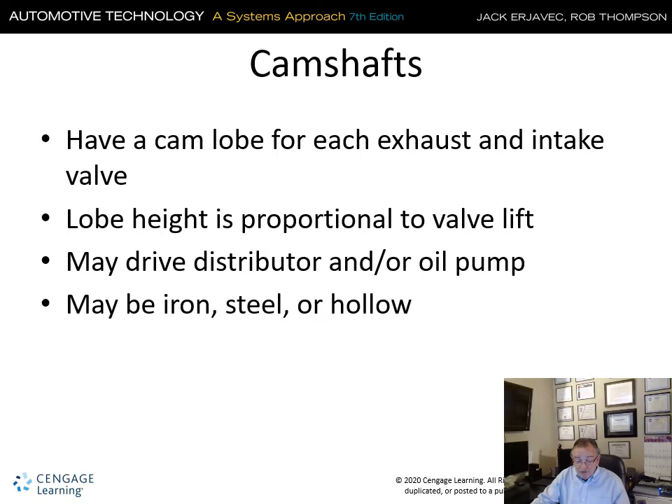Your typical overhead valve camshaft - here we have our camshaft, which is rotating in the block, typically above the crankshaft, driven by a chain or a gear.

This is showing a hydraulic lifter with a roller. There's going to be oil galleries drilled into the lifter, and it receives oil through the lifter bore. If it has that type of lifter, hydraulic, it's going to move oil through the push rod up to the rocker arm, so while the engine's running, you're going to have oil coming out in small droplets.

Here we're taking the motion and moving the push rod up while we move the valve down and open the valve - a pretty basic cross section on how this valve operates. Here it's on a smaller, what's called the inner base circle, so the valve would be closed. As the camshaft rotates around and the outer base circle and the lobe comes into a flank, it begins to push and move the push rod. It's going to move the lifter or cam follower, move the push rod up, and push the valve down to open it. Pretty straightforward.

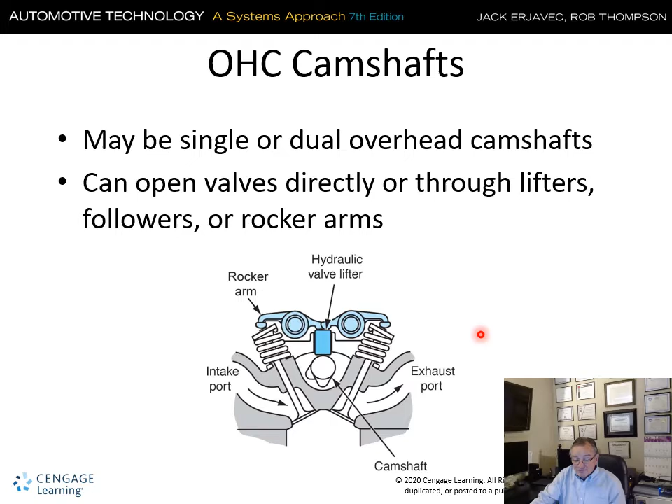You need 2 rotations here, 720 degrees, for 1 rotation on the cam, 360 degrees. So we have half the speed to give us the full combustion cycle, so the valves will open and close per crankshaft rotation. The valve openings and closings are based on the shape of the cam lobe - we're going to get into a diagram there to explain that.

This diagram represents how the camshaft actuates a valve and what actually occurs as the camshaft rotates through the cycle. We'll start up here as we're at the end of the exhaust stroke.

The intake valve begins to open and puts fresh air into the cylinder while the exhaust valve is still open. That's called valve overlap, and it helps cool the piston. Since the intake air is denser than the exhaust, which is burnt air minus the 21% oxygen and lighter and hotter, the colder, denser air will displace the exhaust burnt air. That happens right here.

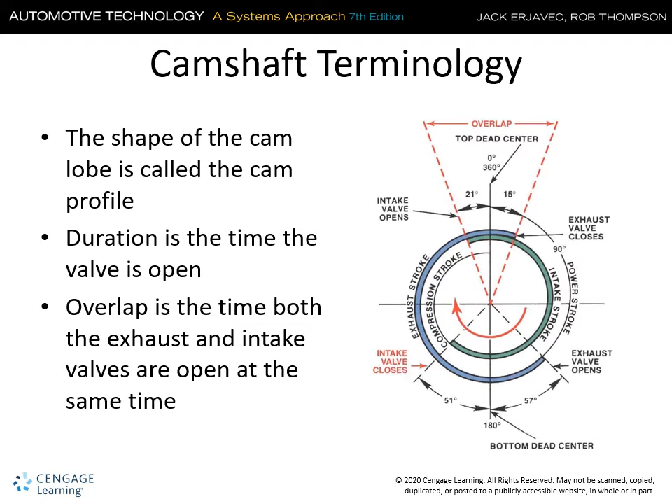We have the valves closed during the compression stroke. We have the valves closed during the ignition and the power stroke, and then the valves open for the exhaust stroke and the intake stroke. It's pretty straightforward once you see it, slow it down, and understand what the valves are doing as the cam rotates.

Here we're showing a camshaft in the block, and the cutaway shows the lifter here. It's above the crankshaft. This one is driven by the rear because it looks like we have a flywheel here, so this one is driven at the rear of the engine.

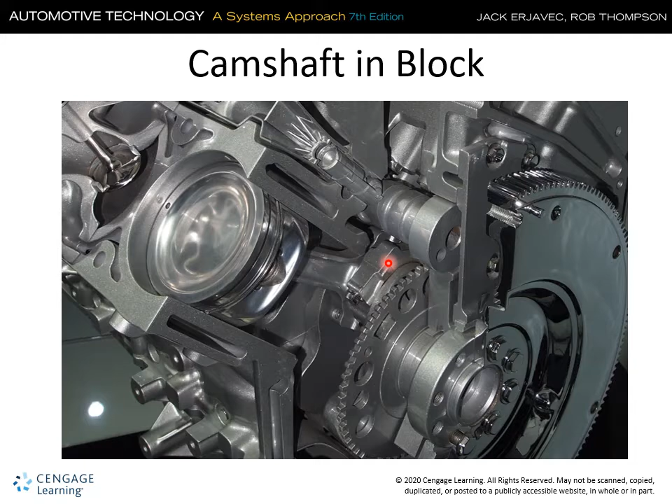So here's your flywheel, and here's what looks like a cam gear. Camshaft drives for overhead cams: we have sprockets on the camshaft and on the crankshaft gear. So we have a crankshaft gear and a camshaft gear, and you can see this one, the crankshaft, is obviously half the size of the camshaft.

Some are over 100,000 - the Hondas are 105,000 - and at that time you want to be replacing all the rotating parts. If you give the customer the option, you want them to understand that the water pump has to be changed, but you also have the belt tensioner and the seals that are below the cam gear and below the crankshaft gear. Anything that rotates should have those parts changed at that time. It would be a recommended service.

Your overhead valve was showing a crankshaft gear with a timing chain. This would have a cover on it, and the timing - the gear will have twice as many teeth on the cam as the crank.

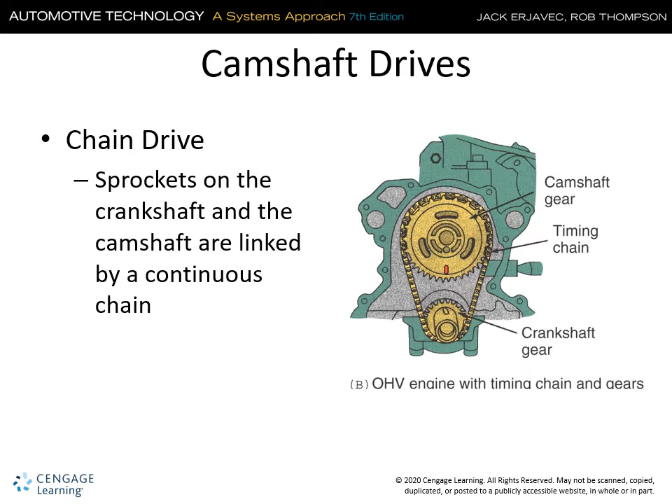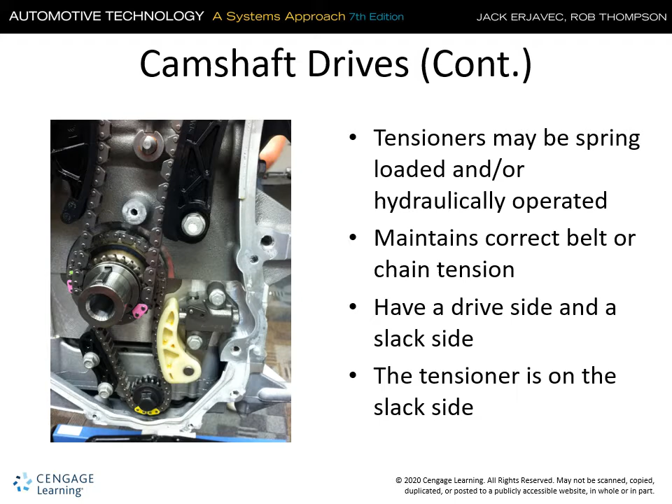Here we're showing a chain tensioner that's located on the slack side of the operation. We need to understand that over time, depending upon how the vehicle is driven, chains can stretch. Also there are instances of chain tensioners failing, so you want to check the technical service bulletins for that particular VIN and see if it has a history of a failed chain tensioner. If not, it's probably going to be okay if we've had the correct frequency of service and we don't have any concerns in the valve train.

Here's a variable valve timing, where we're showing an actuator here that is typically hydraulically actuated. Using overhead cam or overhead valve, it's going to change the timing, the lift and duration of the valve through the camshaft, using an actuator with phasing.

3 types of camshaft drives. You're going to write that down and email it to me, right? Thank you.

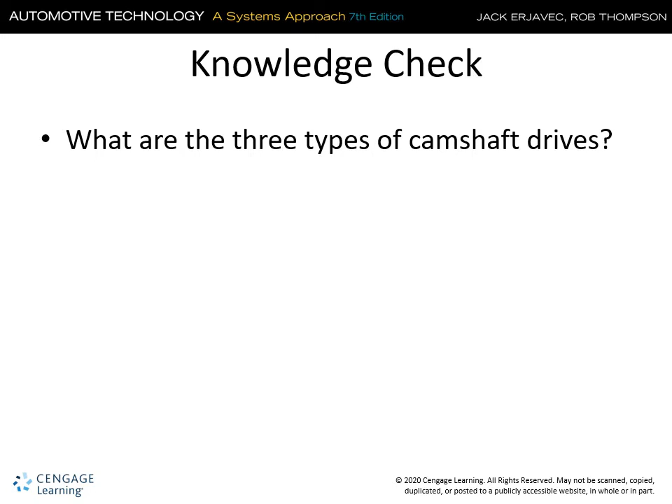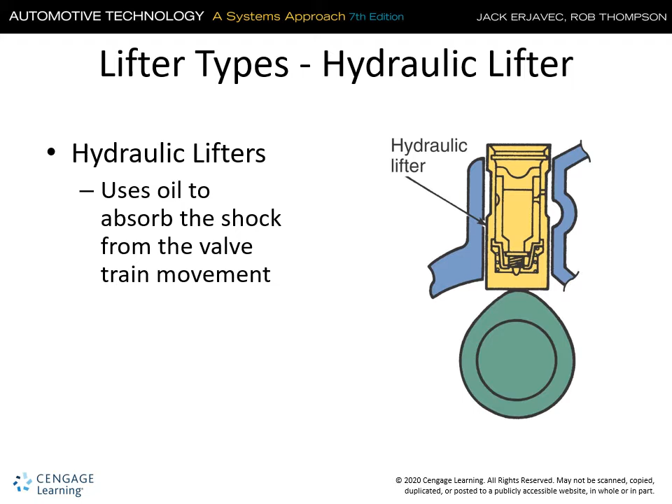Hydraulic lifters have oil galleries in the cylinder head. If this is overhead cam or overhead valve, both of them will have oil galleries. The oil will go into the lifter and actuate the position and the motion of the cam lobe, and that's going to transfer to the push rod or to the valve, depending upon if it's overhead cam or overhead valve where it's in the block.

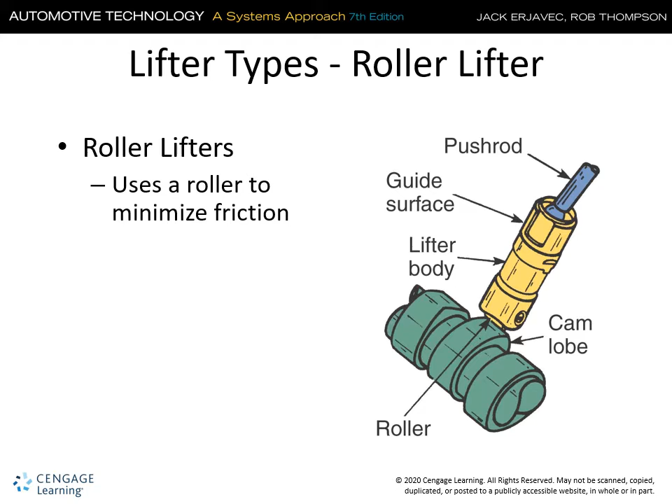Cylinder heads, cast iron or aluminum. Aluminum is the material of choice this century. It contains your valves, your valve seats, your valve guides, your rocker supports, and upper portion of the combustion chamber. There's coolant and oil return passages in the cylinder head, and it's also designed so that you get the performance that's engineered for that particular application.

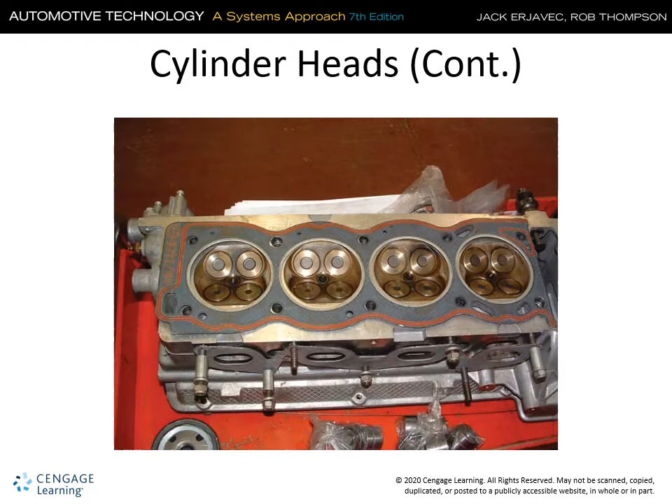This is showing a new cylinder head gasket with the fire ring, and if you look carefully, you should be able to see guide pins in here. They would be located at various locations. At least 2 of them are required to keep the cylinder head gasket from moving. You want to keep it on location.

Intake and exhaust ports are cast into the head. You have a variety of porting geometries and applications, but since most heads are aluminum, some heads have cross-flow or Siamese ports, so you're going to have the port split into two, so you're going to have a single port with 2 ports coming out in that application.

Here's an example of cross-flow and Siamese heads. We're showing the intake with the Siamese exhaust ports on this side, where we have an exhaust from each cylinder going into the exhaust manifold, considered a cross-flow and Siamese. So we have the diagram down here that explains it pretty simply. We have 4 intake ports, and cylinders number 2 and 3 have the Siamese port.

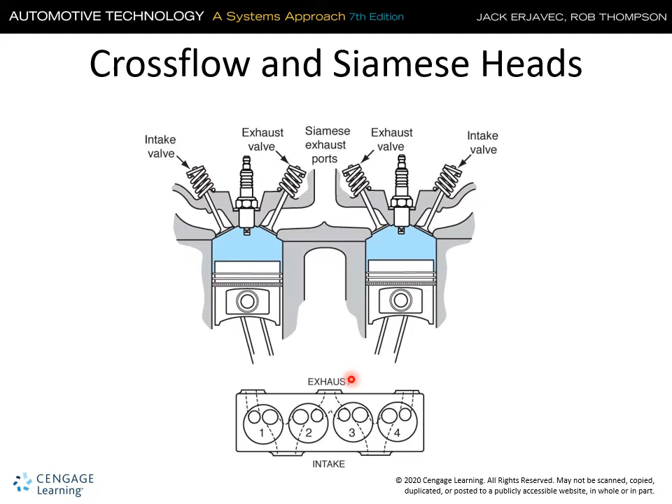Wedge-shaped chamber, spark plug is located at the widest part of the wedge, and in a hemispherical chamber, it's shaped like half a circle, and the spark plug is located at the center of the combustion chamber. Now, there's been a variety of these, engineering to change the location of the spark plug and try to get the most amount of power out of that location. So this has been going on for a number of years.

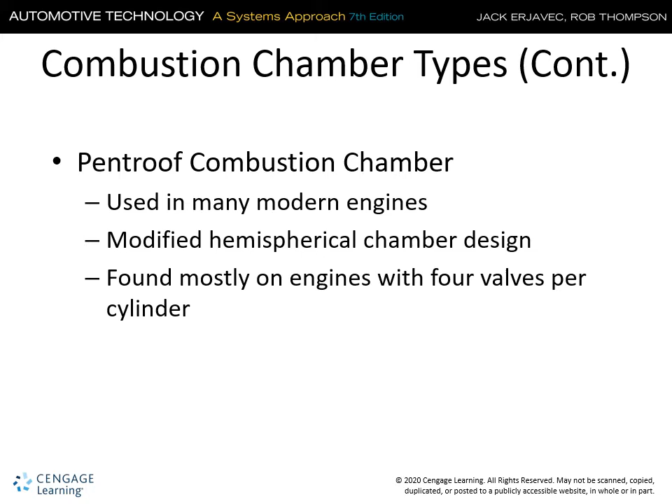A pent-roof combustion chamber is used in many modern engines. It's a modified Hemi design, and it's found mostly in engines with 4 valves per cylinder.

The design of the combustion chamber is one of the determining factors when it comes to the overall efficiency and power of the engine. The 3 most commonly found combustion designs in the U.S. are hemispherical, wedge shape, and the heart design.

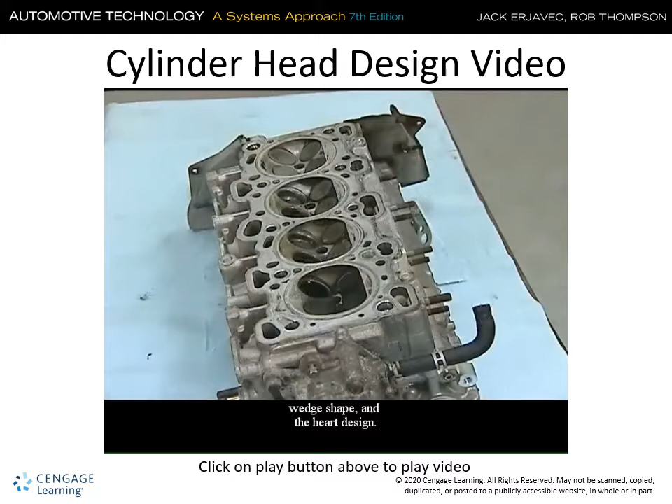The hemispherical combustion chamber looks like a half of a sphere. The valves are placed on an angle with the intake and exhaust located on opposite sides of the chamber, which creates excellent cross-flow and allows the engine to breathe more easily. It typically has a central spark plug, meaning the flame path has a relatively small distance to travel during ignition, creating a very efficient combustion process. The hemispherical design is commonly found in smaller passenger vehicles.

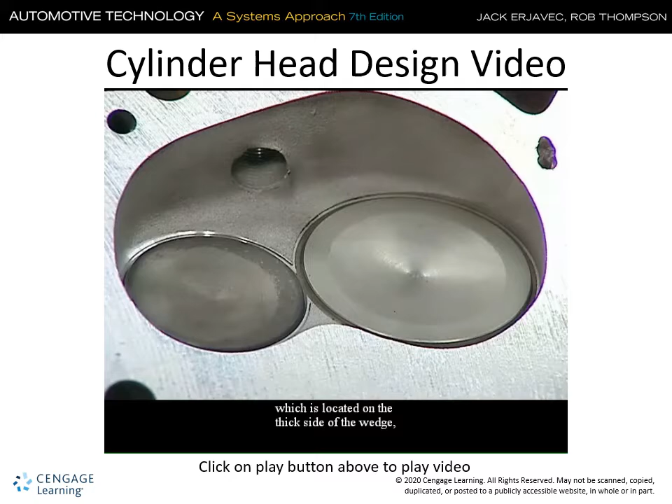In the wedge-shaped design, the inline valves are normally tilted away from the spark plug, which is located on the thick side of the wedge, positioned midway between the valves. The relatively steep walls in this design force the air-fuel flow path downward, resulting in less exhaust.

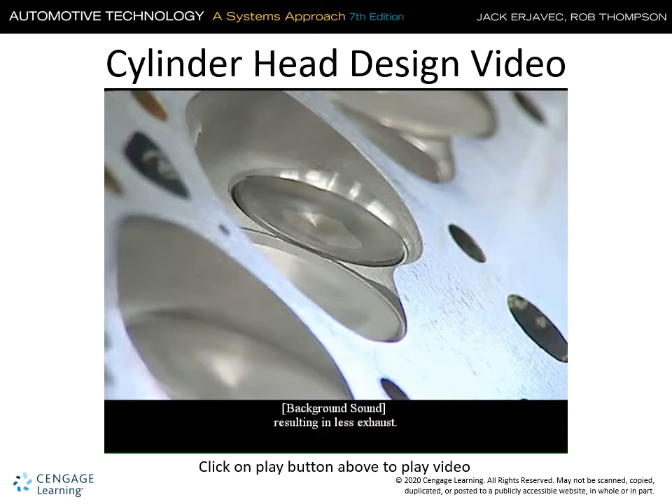The heart-shaped design is almost oval in shape, and the inline valves are side by side. The spark plug is pointed towards the exhaust of the chamber, which makes for a short flame path and increased power.

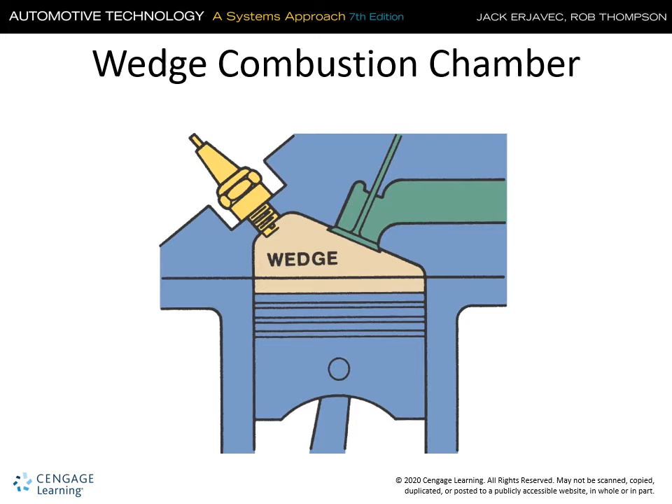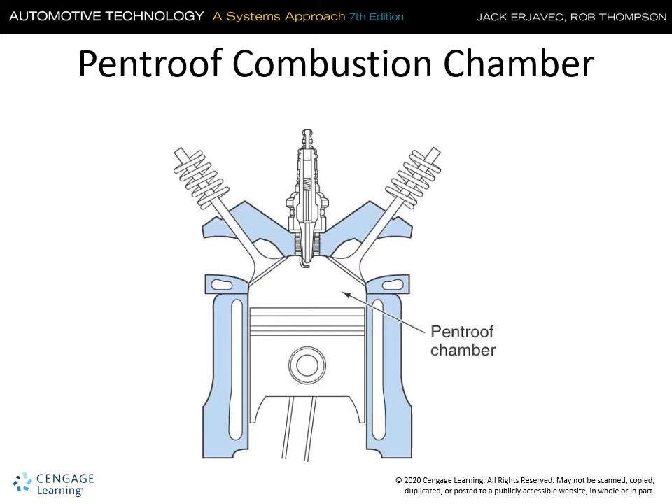The pentroof has the shape of the combustion chamber as a pentagram, and that provides certain efficiencies when you have the flame front and the combustion occur, because you actually have more pressure, giving the combustion chamber more power in this particular application. It's pretty common in today's engines that they went to the pent roof combustion chamber.

Intake and exhaust valves used to be called poppet valves - the British call them that. They allow air to flow in and out of the combustion chamber and seal the upper portion of the chamber. The intake valves are typically larger than the exhaust valves due to the fact that intake air is colder and heavier, while exhaust air is burnt air that no longer has oxygen in it and is at a higher temperature, so it can easily go out of the smaller valve.

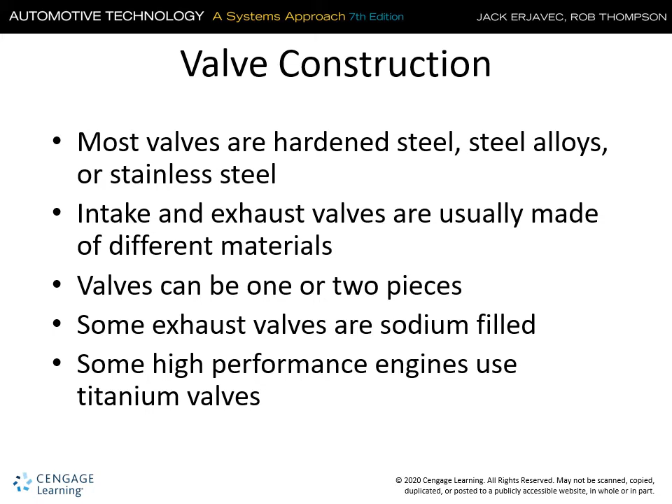Valve construction: hardened steel, steel alloys, or stainless. In most production engines, they're going to be steel alloys. Intake and exhaust valves are usually made from different materials because the intake valve operates in a much colder environment - the stem and up to the face of the valve can be a lot cooler than an exhaust valve. They can be one or two pieces, some are sodium filled, and some high performance and racing engines will use titanium alloys.

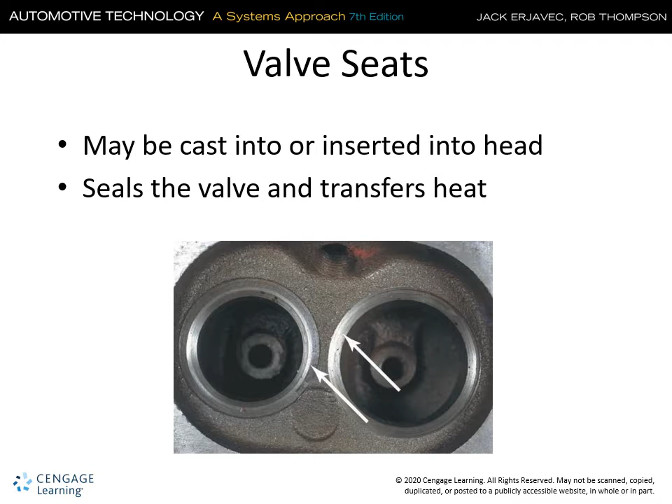Valve guides support the valve motion up and down. There's a virtually minimal amount of valve clearance between the valve stem and the valve guide - just enough room for oil to lubricate the valve stem, and it keeps the valve aligned with the valve seat. So the valve has to be concentric and the valve stem has to be concentric to the valve guide. They can be cast into or inserts in the cylinder head.

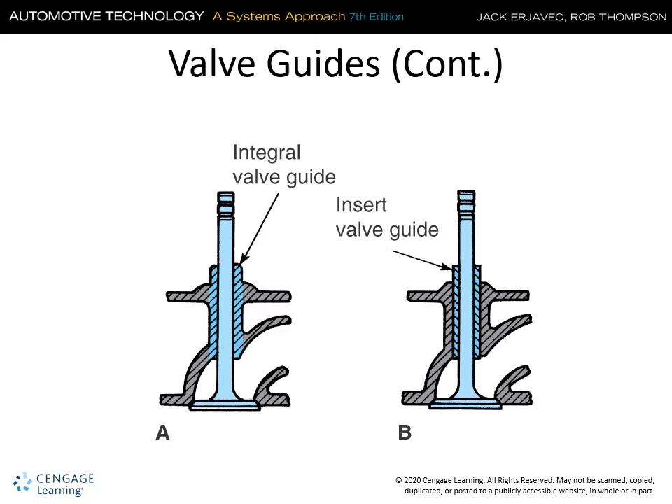Here we're showing a valve guide, which is an insert - a wearable and serviceable item. And here we're showing the integral valve guide, which is just part of the casting. When this wears, the cylinder head has to be completely overhauled. Sometimes if it's high value, they will bore this out and install valve guides; if not, they'll just replace the cylinder head. Typically aluminum cylinder heads, when they overheat, are replaced. Cast iron cylinder heads don't have the type of geometry that deforms and can take more heat than the aluminum ones. So you want to pay attention to what materials you have and what the most likely failure is that's going to send a cylinder head out for an overhaul or just a replacement.

Valve springs, retainers, and oil seals. When you compress the retainer, use the magnet here and keep track of your wedges. Your wedge-shaped keepers are specific to this particular engine, so you don't want to lose a keeper. That could stop the job.

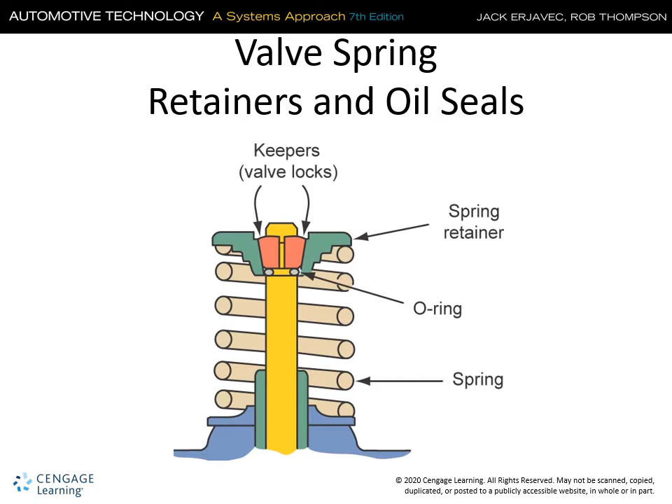Cam followers. There's a variety of cam followers out there in overhead cam engines. They are called buckets, and the hydraulic ones will have an adjustment for lash. Some of these will have shims that control the valve lash, or this one's showing an adjustment. This can be used hydraulically to adjust the valve lash, and it increases the contact between the cam and the valve. There are a variety of different cam actuations and adjustments. With an overhead cam, the camshaft is located right at the valve, so we don't have the lifter, push rod, and rocker that you'd have in an overhead valve engine. So an overhead cam has far fewer parts and is much closer to the valve it's actuating.

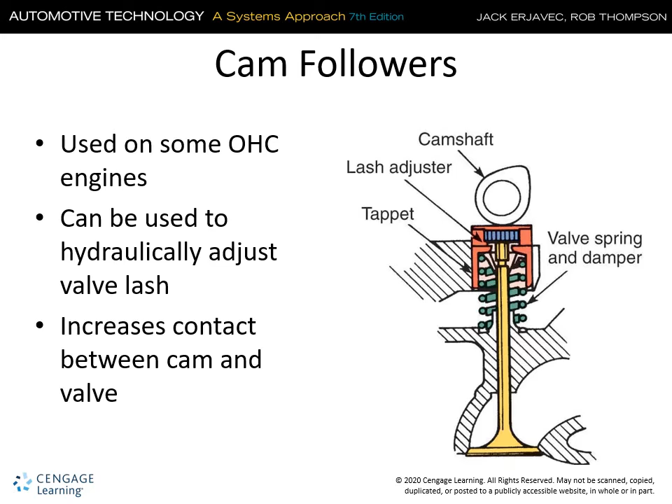Camshaft bearings. In many overhead cam engines, we have an aluminum cylinder head with an aluminum bearing cap and hardened steel flange bolts with a specific taper, and oil flows through the cam cap. That bore machined into the cylinder head has oil galleries drilled in, keeping oil flow through the bearing side of the cam. These applications generally don't necessarily have bearings; they increase the oil flow, and it's enough to keep the cam moving clean and without friction on the aluminum, so it needs that oil. Having the correct frequency of oil change and keeping the oil clean will keep this application running longer.

In engines that get sludge, they're going to create problems with friction in an overhead cam situation like this. So correct frequency of service is very important to the operation of these overhead cam engines.

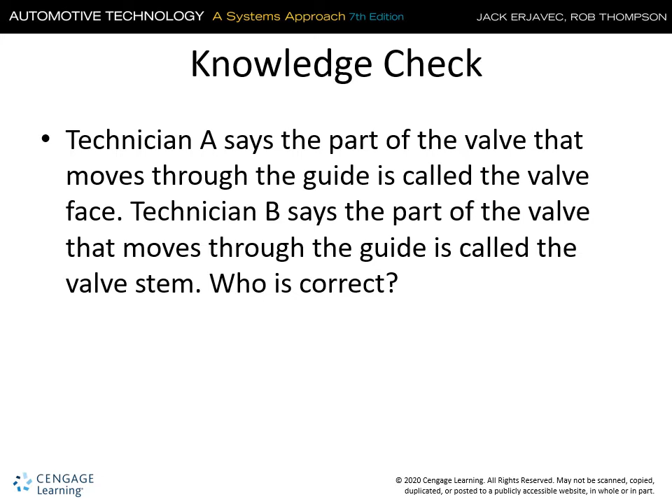Multi-valved engines. We typically started out with 2-valve engines. A lot of engines today are 4-valve, with 2 intake and 2 exhaust valves. We've seen 3-valve engines coming from Japan and Europe, with 2 smaller intake valves and 1 larger exhaust valve. We've also seen 5-valve engines with 3 intake valves and 2 exhaust valves. So there's been a variety of utilizations engineered into engines. However, the 4-valve is the most common configuration you'll see today.

Variable valve timing technology controls 3 key characteristics of intake and exhaust valves: the valve timing, the point at which the piston moves and which valves open and close; the valve duration, how long the valves stay open; and the valve lift, how much the valves physically open.

To do this, there are different sensors such as airflow and camshaft positioning sensors. They feed information to the engine control unit, which uses a variety of mechanisms to control the valve characteristics. A Honda VTEC, for example, physically moves the camshaft to give the valve more lift. There are a few different ways manufacturers do this, but performance is what drives this feature in valves today.

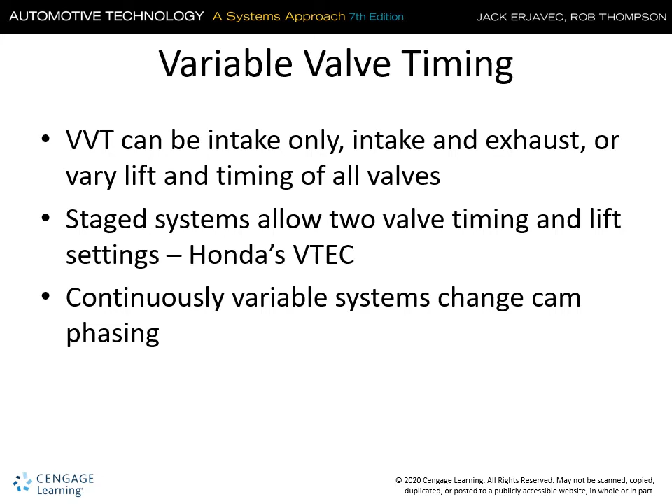Vehicles equipped with variable valve timing have become commonplace over the last 15 to 20 years. Different versions of variable valve technology exist, with the ability to switch cam lobes within the RPM band to offer valve lift, duration, and timing to suit various performance needs. Even before this, engines used a phaser to manipulate cam position and valve timing.

The phaser style of variable valve timing is common today. They can be found on just intake, just exhaust, or both intake and exhaust cams. The alteration of cam position changes the cam center line of the lobe and the separation angle between the intake and exhaust cams. This gives flexibility in improving fuel economy and power while continuing to meet emission standards.

The powertrain control module duty-cycles a solenoid that alters the valve position. The oil control valve is an oil traffic control device, and it determines which ports receive pressure and which are vented.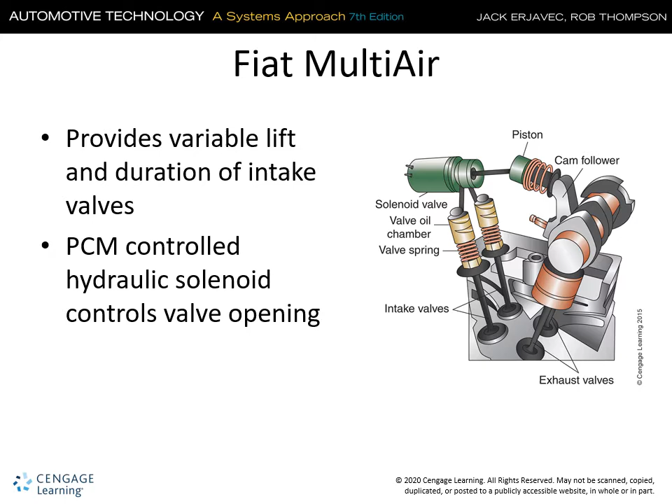Cylinder deactivation is common in today's modern vehicles. Manufacturers try to save fuel and have just enough cylinders active for the power needed. So how does cylinder deactivation work? It basically closes the intake valves that draw in air and the exhaust valves that release spent gas. It also stops injecting fuel into the cylinder.

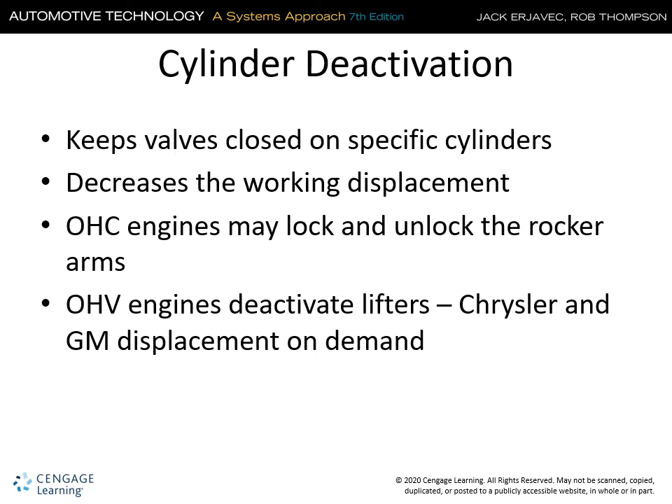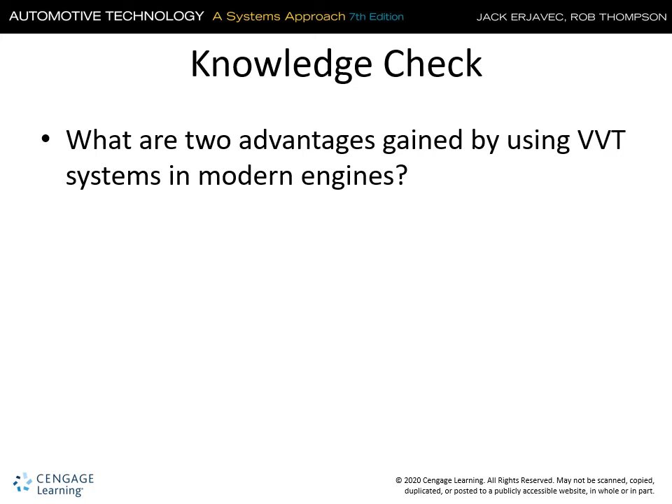On to cylinder head disassembly. Measure spring installed height before disassembly. This way you know if everything's assembled correctly—you have your wedge-shaped keepers and your retainer correctly positioned—you'll have the ability to match the height that was originally in here between the base and the bottom of the retainer with an installed height. So you know what that height is before you continue. If you know what you had before you disassembled it, you have a better chance of attaining that measurement when you do your assembly.

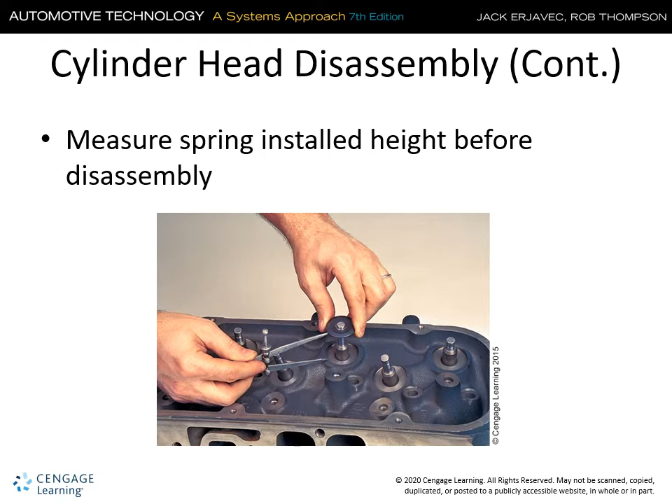For cylinder head disassembly, you could use some tools to loosen the valve keeper. Some people tap them with a soft mallet and a socket. We're using the pneumatic spring compressor in school, which makes it nice to remove the keepers. Just take care and organize all the parts that come off—your retainers, your keepers, and your springs. Those have to be organized per cylinder and valve location.

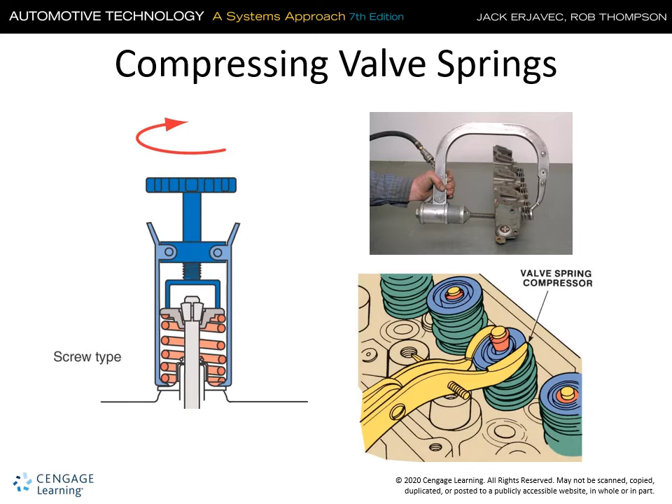Different types of compressors. We're using this one at school, but in other situations you have to adjust the arms so that you have clearance between the retainer, the valve stem top, and the two wedge-shaped keepers. There's a variety of tools out there that control the pressure on the retainer. In this situation, you can slowly apply pressure and your valve keepers aren't going anywhere. When you use the pneumatic one, it activates quickly, so you have to adjust the reach of the arm to get just enough compression to expose your wedge-shaped keepers, and you can remove them with your magnet and continue.

Cylinder head inspection. Any interference damage between a piston and a valve is typically fatal to the cylinder head, and you can have cracks in the area of the valve guide.

Any dent, scratches, cracks, or heat effect should be noted. You want to check the intake and exhaust manifold mount and surface flatness with a straight edge. Those have to be perfect.

With aluminum cylinder heads, once you have damage in one spot, it's probably time to replace the head. So you want to do a thorough inspection once you have all the components out of the cylinder head. Measure cylinder head warpage in a variety of axes.

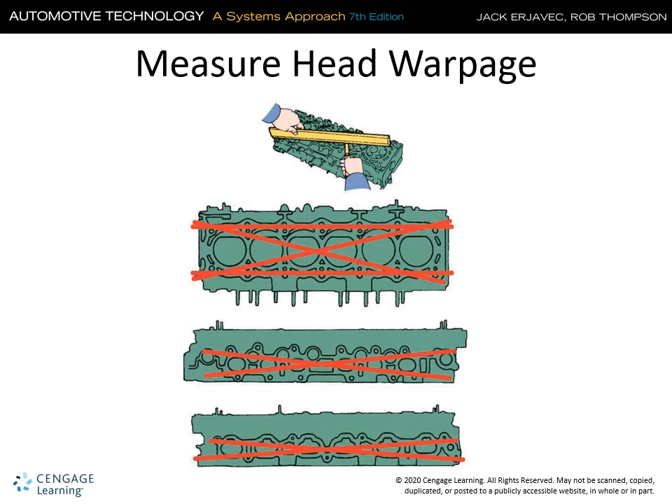You need to do this so that you're sure the intake, exhaust, and cylinder head surfaces are within specification. If you don't, your ability to gasket and hold the necessary pressures won't be there. So you want to make sure there's no cylinder head warpage, otherwise you could be building an engine that won't last, and you don't want to do that.

Check aluminum cylinder heads for porosity leaks. Aluminum will degrade from electrolysis, it'll degrade from vibration, and it'll fatigue differently than steel. So you want to make sure everything has a good physical look to the surface. For thicknesses, you have to utilize manufacturer specifications whenever something has to be go or no-go in the process. The styles of heads require proper cam bore alignment, so you want to make sure the journals are sitting in a cam bore appropriate for that particular application.

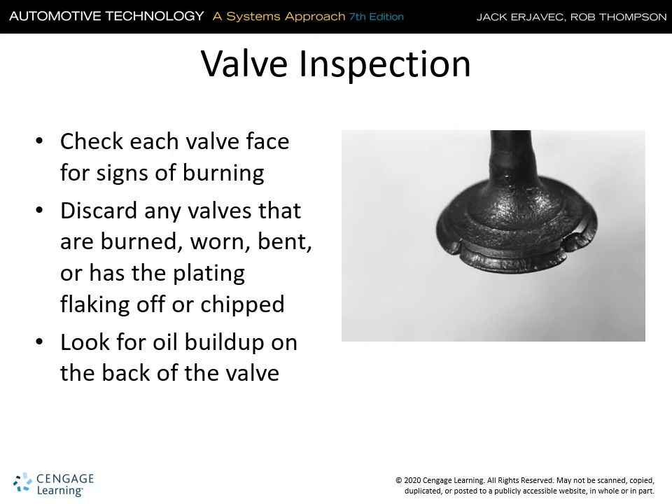Valve inspection. Burnt valve faces, no margin, oil buildup, and carbon buildup are all signs that valves need to be serviced and or replaced. A critical dimension here is your valve margin. The margin has to meet a minimum called out in specification, because if you don't have a valve margin, you're going to have a burn at the location where it seals.

The top of the valve stem can mushroom, and sometimes you can take a certain amount of material off the valve and shim the spring the appropriate amount. But the diameter, the straightness, and the angle of the valve face are all considerations for wear. You want to be aware of where you're looking and what the specifications are for that particular application.

Valve seats: again, heat effect, burning, cracks, and deterioration. Check for any loose seats. Valve seats can sink into the cylinder head further than they should, and seats need to be replaced if the valve was broken or bent.

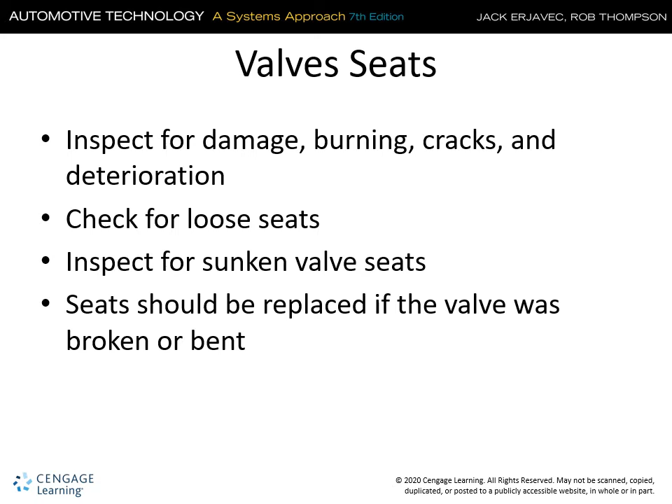Valve seats can be pried out if you do it carefully and gradually so you don't damage the cylinder head. Retainers and keepers: worn retainers will allow the spring to move away from the valve center line. That will affect valve operation and eventually drivability if it's extreme.

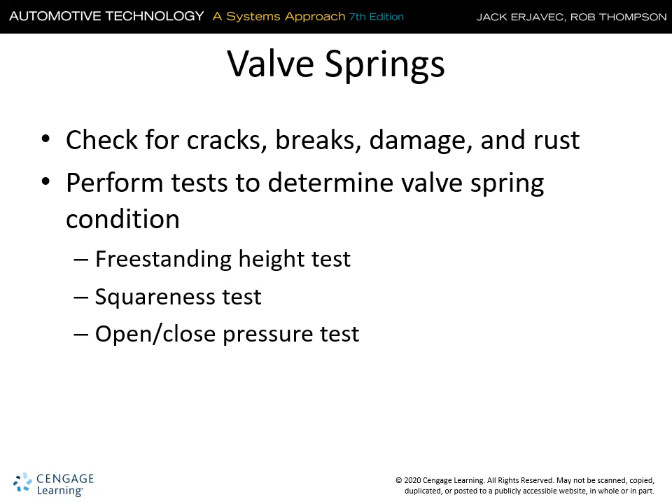Valve springs have freestanding height, squareness, and the pressure when the valve is engaged. Those specifications come out of your Mitchell Pro Demand or a manufacturer's platform for that particular vehicle and engine.

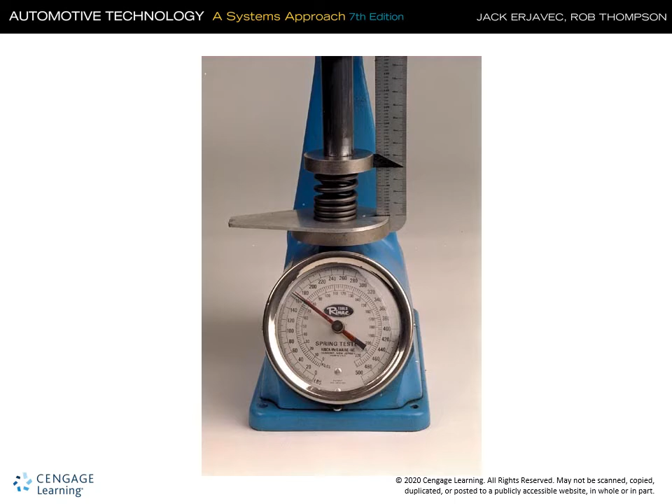We also have the pressure called out by the manufacturer for valve actuation. We want to make sure the springs have the correct pressure specification once they've been actuated. So you go from installed height on the ruler to the actuated height for the valve fully open, and you write down your pressure. That's a job sheet you need to do for that.

Inspection of the valve train. Timing belts are typically replaced when the engine and or cylinder head are rebuilt. Check that there are no fluid leaks that can damage the belt. If you have coolant or oil leaking on your timing belt, that could seriously degrade the strength of the belt, and you want to make sure that's not happening.

Timing chains will stretch over long periods of service, so you want to make sure the belts or the timing chain are within specification.

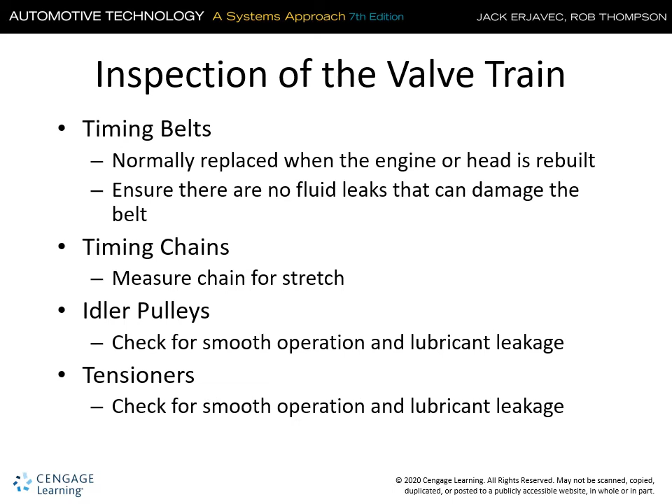Idler pulleys: in some applications, you want idlers and tensioners not only checked, but if you have a 100,000-mile service interval with your timing belt, you definitely want to replace the water pump and anything that rotates, including tensioners and idlers. Also, while you're in there, get the seals out of the camshaft and the front of the crankshaft, because they're easy to get to and only take a small amount of time to replace. This is a good practice to offer the customer for a small additional fee.

Check gears and sprockets for any wear, breakage, or alignment problems. Cam phasers have a testing procedure, as do cam followers and lash adjusters. Lash adjusters have to be cleaned, typically soaked in some type of solvent and blown out with gentle compressed air, because they have oil galleries in them. Zero lash adjusters, if they're not working correctly, can cause drivability concerns.

Rocker arms: the contact point and the oil holes have to be clean. Push rods, you have to check them for oil passage and straightness, so you can soak them in solvent, blow them out with compressed air, and roll them on a flat surface—if there's any wobble, they're not serviceable.

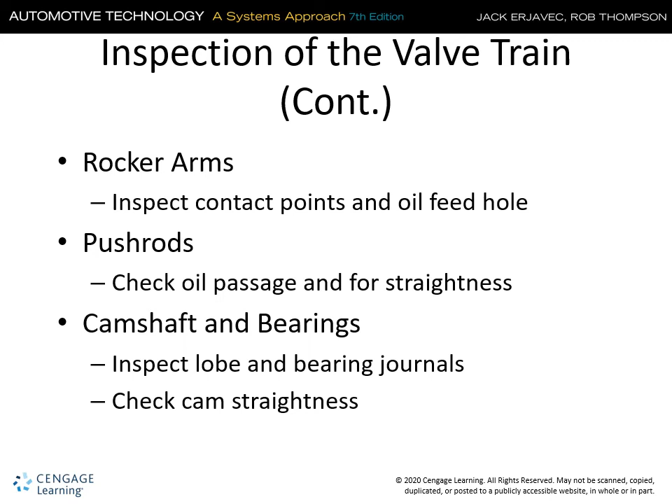Camshaft and bearings: inspect the lobes and the bearing journals and check the cam for straightness. Typically on a V-block with dial indicators will show you any run out that occurs, and you only have a very small amount of allowable run out on a camshaft, so you want to make sure you're well within specifications. If it's borderline and you put it in an engine, the engine may not survive very long, and the valve train could have drivability issues or complete failure.

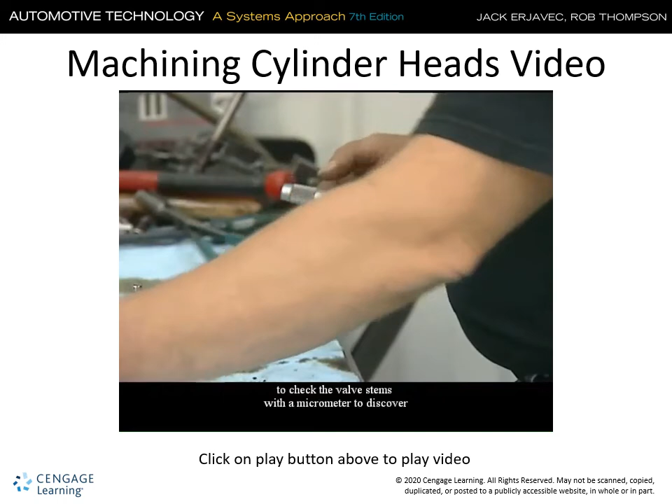Before any work can be done on the cylinder, you'll need to check the valve stems with a micrometer to discover if they can or cannot be reused. If they can be reused, grind the valve tip just enough to flatten it, and then angle and clean the valve face until the surface is nice and smooth. If you notice that the grinding wheel can't make contact with the entire face of the valve, throw it away—it means the valve stem is bent and needs to be replaced.

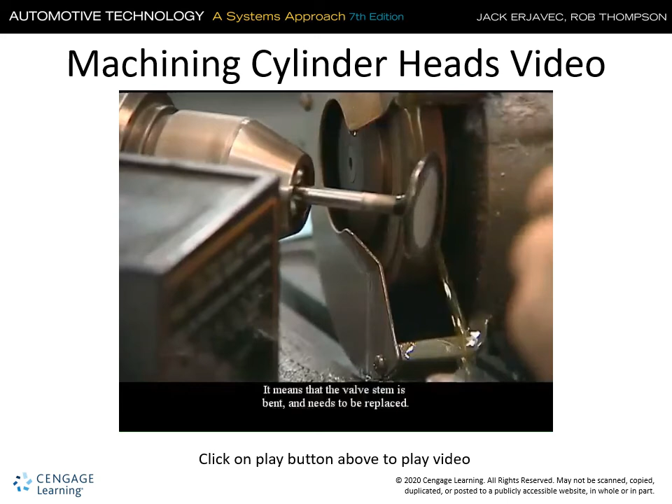Once you've made a determination about the condition of the valve and stem, the next step is to check the valve guide, which can typically be repaired by pressing a thin wall of bronze into the head with an air hammer. Once the lining is in place, a calibrated steel broach is driven all the way through the bronze liner, and then any excess liner remaining on the top and bottom is removed.

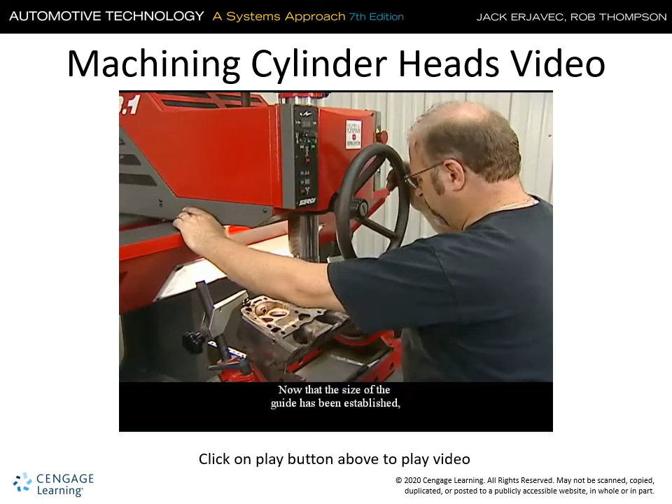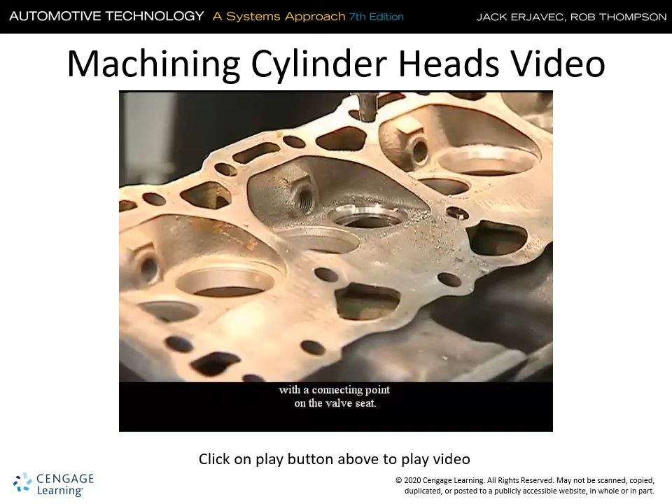Now that the size of the guide has been established, the next task is cutting the valve seats. Many of today's valve seat and guide machines use 3-blade carbide cutters that allow the operator to cut all 3 angles of the valve seat at the same time. The top and bottom cut, also known as the throat cut, is designed to maintain proper airflow in and out of the chamber, while the middle cut, or seat angle, provides the valve face with a connecting point on the valve seat. The same process is used to cut both the intake and exhaust seats.

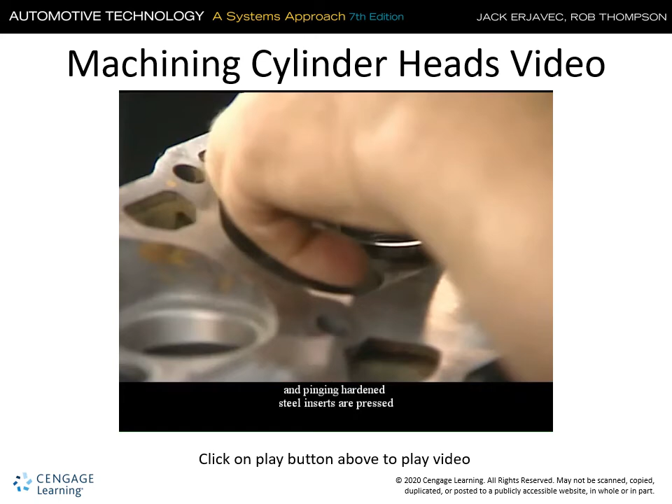However, since lower octane fuels cause intense heat and pinging, hardened steel inserts are pressed into the bored-out exhaust seat for added protection. Once the valve work is done, the next step is resurfacing the head. Take the head and place it on a leveling fixture until it's level, and then set it up on a decking machine. Once that's finished, you can begin resurfacing the head, keeping in mind that you should remove as little metal as possible when doing so.

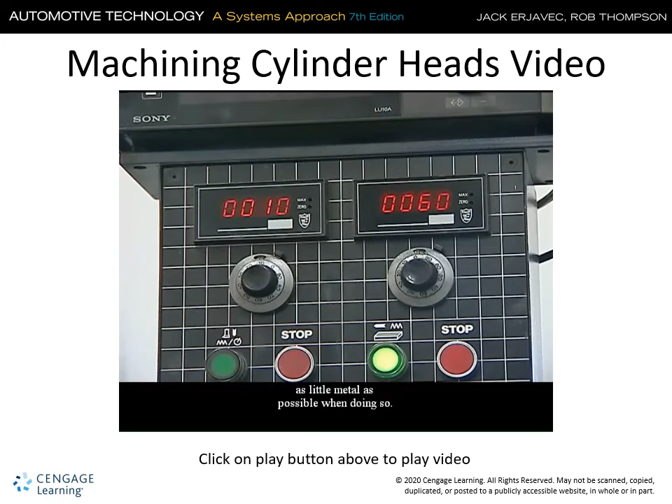The more metal shaved from the heads, the higher the compression ratio, and the closer the valves are to the top of the pistons when they open, which could increase the likelihood of pre-ignition or detonation.

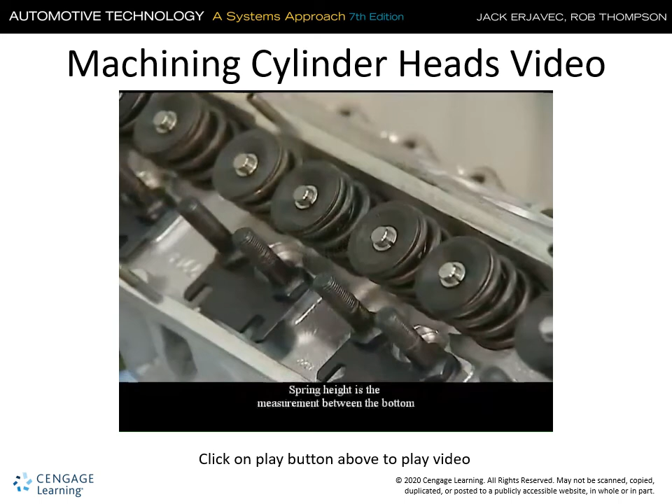Once the head has been resurfaced and thoroughly cleaned, bring it over to a bench and calculate the spring height using a spring height gauge. Spring height is the measurement between the bottom of the retainer and where the spring rests on the head.

After these measurements have been taken, the springs are put in a spring checker and compressed to the size of the installed height. This tool will indicate whether the spring is exerting enough pressure to keep the valve properly seated. If it's not exerting enough pressure, you can try using a shim to give it more tension, but if it still fails the test, the spring will need to be replaced.

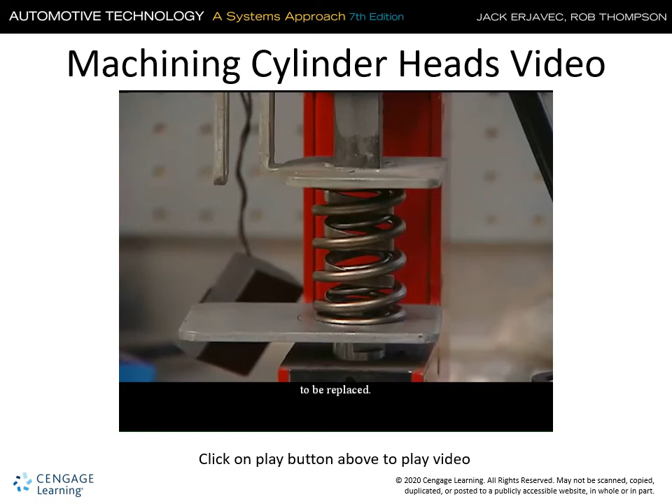Once you've determined the final installed spring height and have checked spring tension, you can go ahead and install shims, spring seats, and valve seals, followed by the springs, retainers, and keepers.

Resurfacing of a cylinder head. You can only take off a small amount of material removal. Otherwise there are a lot of concerns. You can have some interference concerns with the piston hitting the valves. That's one item that you have to be aware of.

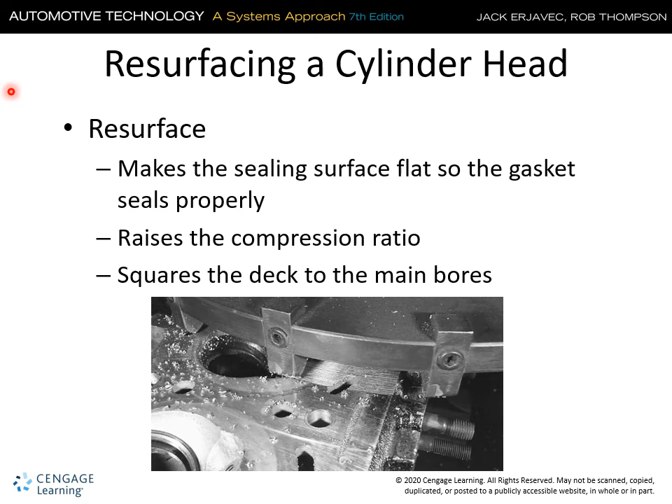Also, the compression ratio—there are aftermarket cylinder head gaskets that are thicker that can accommodate a small amount of material removal, but typically 5 or 10 thousandths, or as little as possible. If you get over 20 thousandths, you're now changing the compression ratio, and going more than any known amount called out in your specifications, you can have concerns with the interference between the valves and the pistons, so you want to pay attention to that.

Removal guidelines. Resurfacing reduces combustion chamber size, reduces the head thickness, changes the valve timing, and may reduce valve to piston clearance, as we just stated. So intake manifolds on V-type engines may not align, so there are concerns when you machine the deck of the block.

Valve faces. Valve angle faces and dimensions must be kept within specifications. You must have the correct angle. You can have an interference angle on the seat, the valve insert seat, and you can have a concern with the margin, the valve margin.

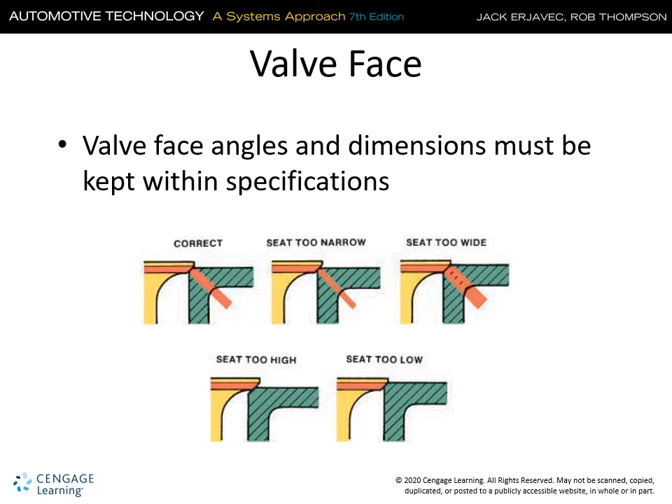So these are all required that we take a very close examination of the concerns that are likely to happen in cylinder head service. The valve grinding the face sets the valve lower to the port, so extending the valve stem height. So now we have to shim the spring in order to do that.

So the seat may not be replaced. If it is replaced and it's ground, you're going to be changing that dimension, so you chamfer the valve tip after grinding. The valve or the valve seat may need to be replaced if there's an incorrect valve height. You can only cut so much material off a valve insert, and if you get higher than that, you have to put a new insert in order to correct the specification.

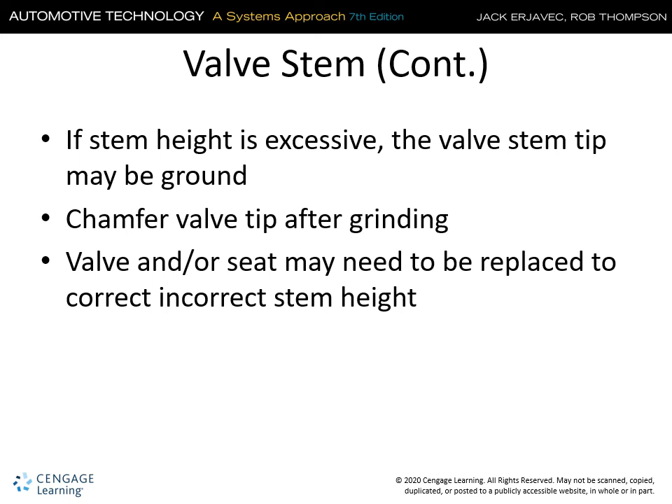Valve guide clearance. There can only be a really small amount of material. When you use a small hole gauge, you have to take the measurement in 3 places, because if you don't have the right dimension in there, the valve is not going to stay concentric to the seat, and it won't seal correctly.

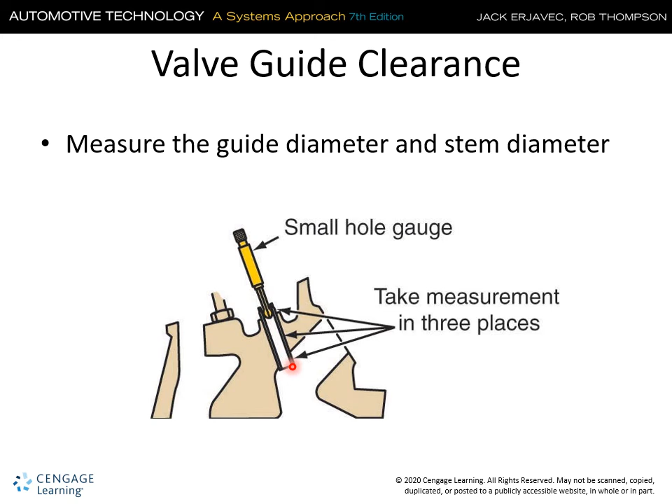And you can have significant and untimely valve failure, and that is something that you want to avoid. So you have to be diligent and check in all 3 locations within the guide with the small hole gauge, and make sure you're within specification.

Valve guide problems. Inadequate lubrication will wipe out the valve stem and the guide. Valve geometry problems. If you have a valve that's not perfectly square with the stem, and if you have the wrong stem and guide clearance, you're going to have oil consumption. When you see an engine start up and you have a cloud of blue smoke, you know that you're pulling oil into the intake valve guides, that's for sure.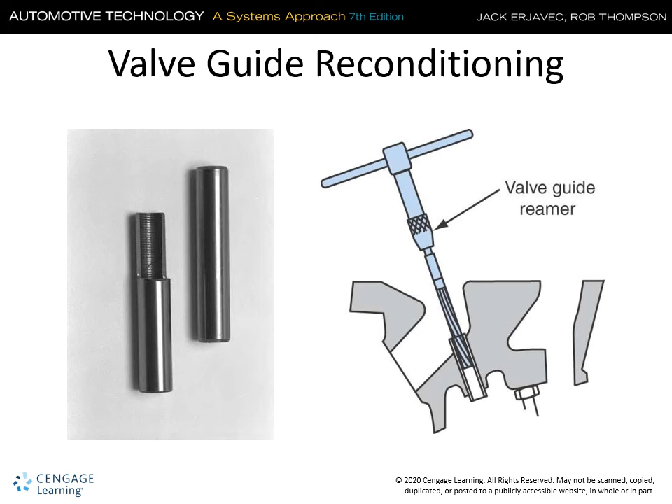Here we're showing valve guide reamer. You have an insert that you can put in, drive it in. You have a reamer that's going to cut the correct size. That's a known diameter that the reamer has to be cut to that correct specification, and you're going to test it with the small hole gauge when you're done, and you're going to cut off the extra material that's at the top. They're showing the valve guide height.

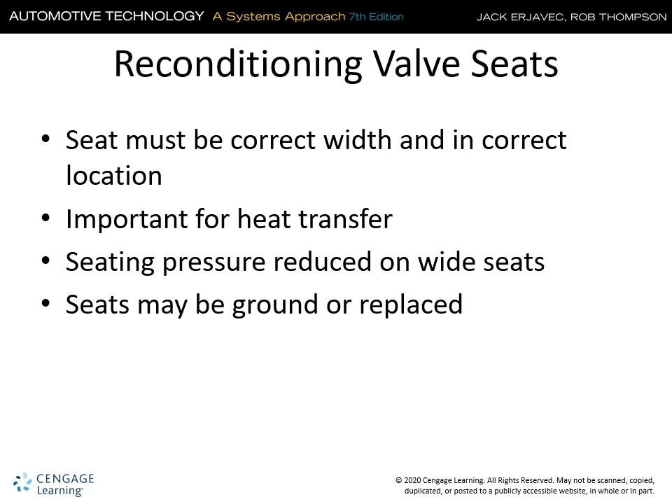Reconditioning valve seats. Seat must be correct width and correct location. If not, you're going to have a heat transfer problem, and seating pressure reduced on the wide seats, and seats may be ground or replaced. You only have approximately 1 service that you can do to a valve seat insert.

Measuring seat width. You have a scale that you have to use to check that width, otherwise you don't have enough material there to seat the valve and handle the heat effect from the combustion.

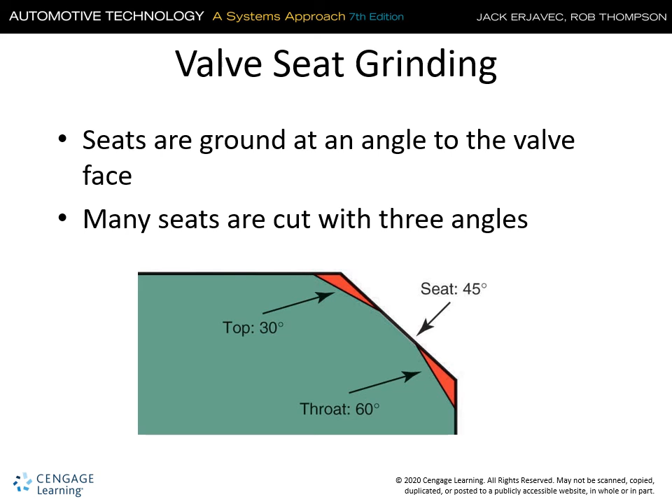Valve grinding. There's a small amount of interference that can be cut over and above the initial 45-degree angle.

Valve seats are hardened and are often pressed into a cast depression. Valve seats are sized to match the valve shape, and when it comes into contact with the valve face, provides a leak-tight seal. Seats for cylinder heads are typically made from an iron alloy.

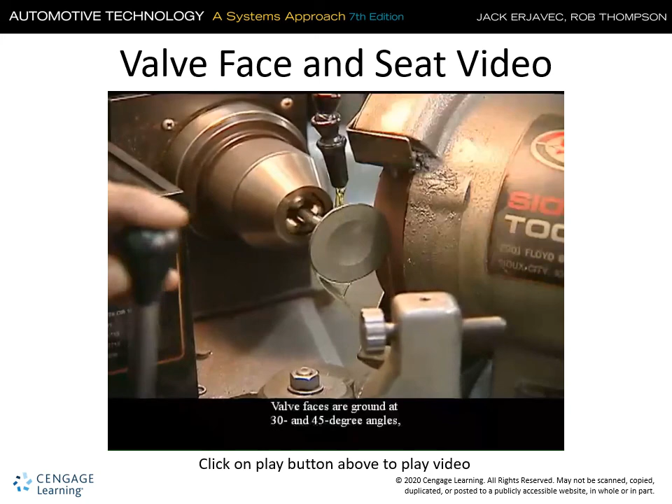Valve faces are ground at 30 and 45-degree angles, depending on the engine. The intake and exhaust valves rest on the seat, which is typically ground to the same angle as the face. However, they can differ. For example, resurfacing the face at 45 degrees and the seat at 46 degrees.

The difference is called an interference angle. An interference angle allows for expansion between the valve face and seat of a new engine.

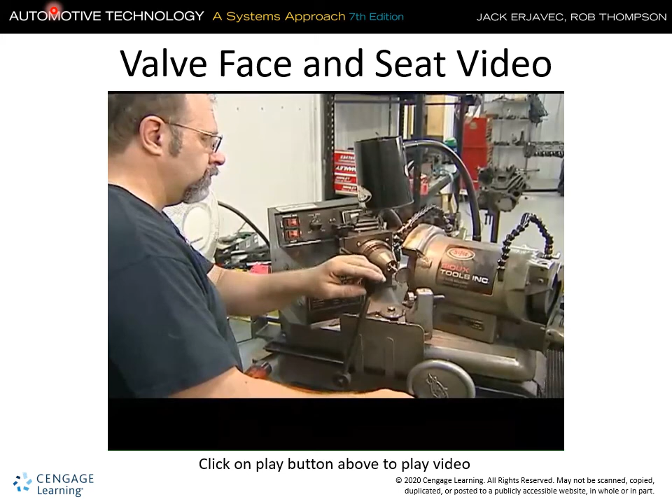Checking valve fit. You could use Prussian blue. You can see what you get when you put the valve open and closed against the seat, and see if you have any gaps in the bluing effect. And that's an inspection pattern with the dye, so you want to see an even pattern of blue distribution from the machinist blue between the two surfaces.

Valve lapping is another way you can remove any of the small imperfections in the contact area from the cutting tool. This is important. You can also use lapping compound to see how your fit is going to be between the valve and the valve seat. So the valve face and the valve seat can also be examined by the pattern of the lapping compound when you rotate it with the suction cup tool.

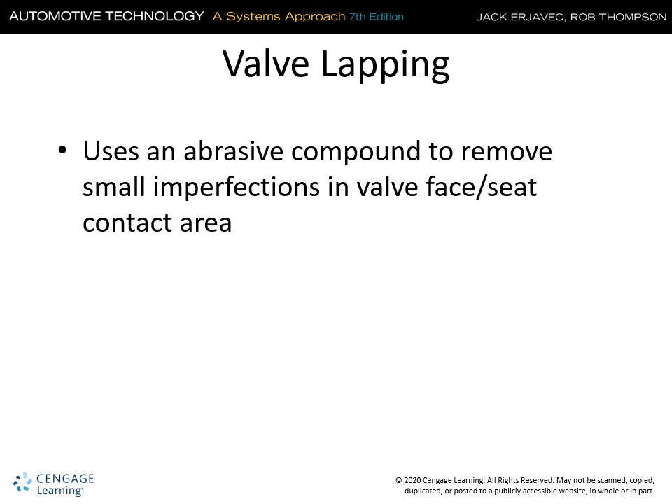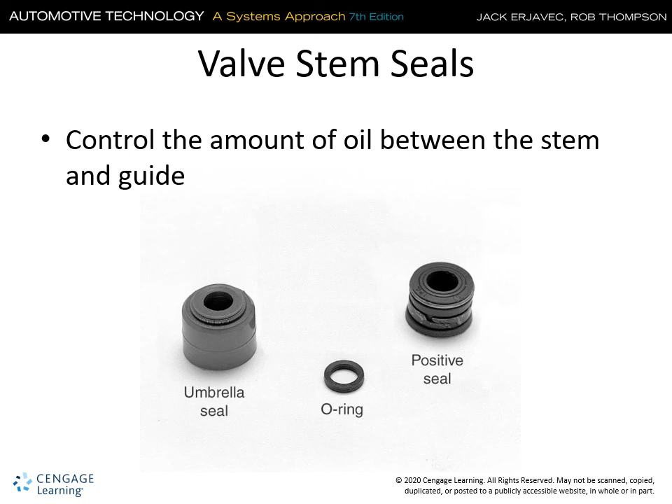Valve stem seals typically are replaced at every overhaul. You have different styles, but they only allow a small amount of oil to coat the valve stem. And if these are not working correctly, they're going to allow oil to get into the combustion chamber, and they're only going to wear out. They're not going to work correctly.

Assembling of the cylinder head. Your installed stem heights and installed spring heights have to be checked as you install each valve. The stem height is affected by the valve and the seat, and valve spring height may be adjusted using shims.

Typically, shims will come in 5 and 10 thousandths increments. You may have a spacer style that may be up to 20 or 25 thousandths if you had that much material removed.

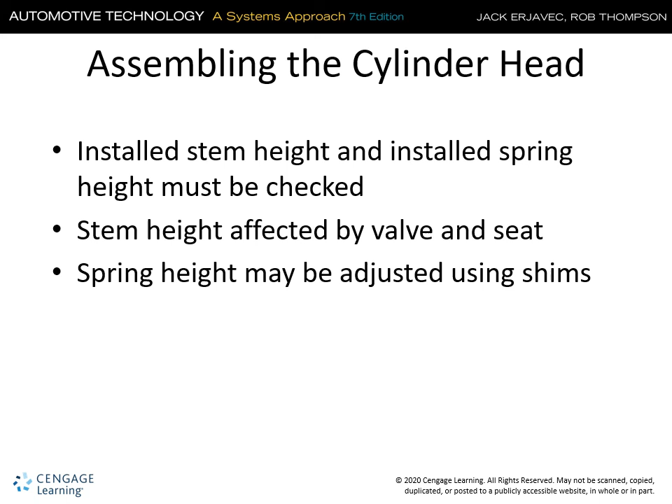Assembling overhead cam heads. Cam full round inserts are pressed into the head. Don't use overhead valve cam bearing tools when you're doing overhead cam heads. Some overhead cam engines do not use insert bearings.

They're just going to use the oil that flows through between the bearing cap and the bearing bore and the cam journal. Coat all rockers, adjusters, push rods, lifters, and other parts with oil for assembly, and adjust the valve lash and install the cylinder head.

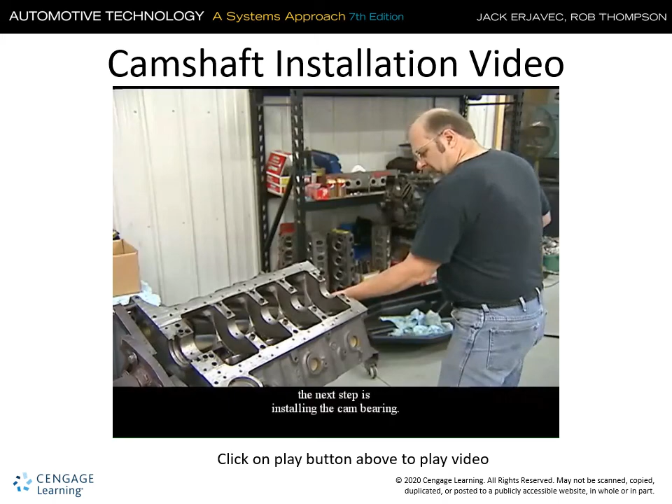After an engine block has been disassembled and prepped for rebuild, the next step is installing the cam bearing. Begin by placing the bearing on a rubber mandrel, and then insert the mandrel into the block and tap the bearing into place.

On an overhead cam, the first step is reinstalling the hydraulic lash adjusters and rocker arms. Next, place the camshaft in the head and then lubricate the cam lobes.

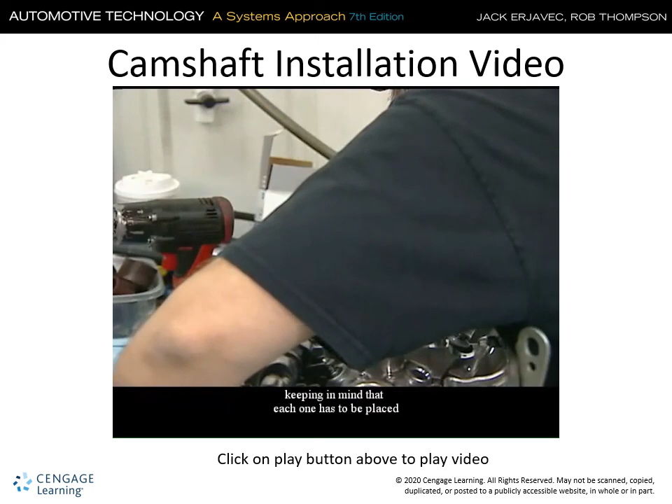After that's finished, install the bearing caps, keeping in mind that each one has to be placed in its proper position. Once in position, each cap is hand tightened with a socket wrench. The ring seal and timing sprocket are installed next, and then the caps are torqued to specification.

Once installation of the camshaft has been completed, the lobes are lubricated a second time.

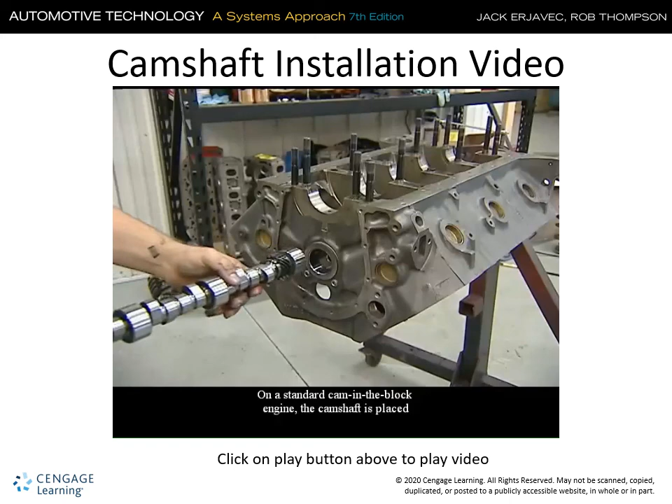On a standard cam-in-the-block engine, the camshaft is placed into position with an installation handle, which is used to gently slide the camshaft into the block. You should make sure not to damage or dislodge any bearings during this process. Once installed, the camshaft should rotate freely.